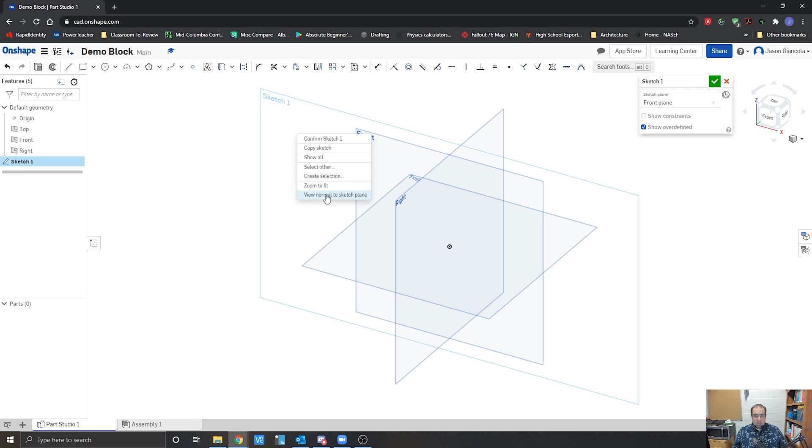This style, I'm going to do the full cutout. So we're going to draw the whole profile and then extrude it out. All right, so the first thing we do is draw a sketch by clicking the sketch button in the upper corner. We're going to right click and go view normal to sketch plane, and it's going to rotate our view to where it's flat, looking at the sketch plane.

The next thing I'm going to do is utilize the line tool. We're going to draw this out, draw up a little bit, give it that angle, draw back, and then draw vertically down.

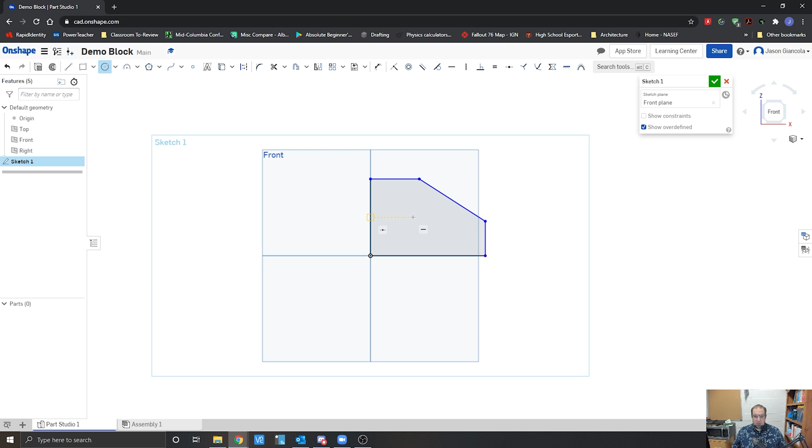Next thing I'm going to do is place this circle. I'm going to line up over the midpoints, and we're going to see a projection line coming out, and I'm just going to place a circle there. So once again, I'm going to draw everything in and then come back and dimension it.

So here we go, that's the block outline. We're now going to go up to our dimension button. We're going to click that full length over here. This whole height is 2. This length right here is 1.5. And something you're going to notice is we do not have to dimension this horizontal length.

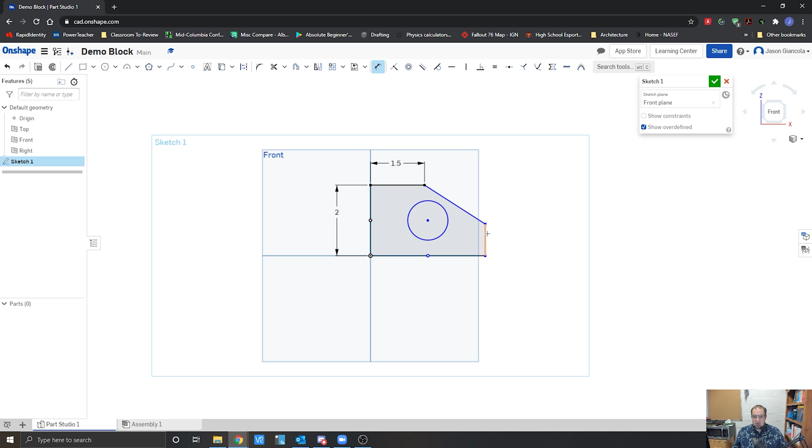This angled line right here, we don't have to dimension it because we're going to be defining both endpoints based off of the heights that we give them. And then that line will actually turn black once this one is placed. And then we just have to apply our number right here, which I believe that size is 1. And we have the sketch of the block done.

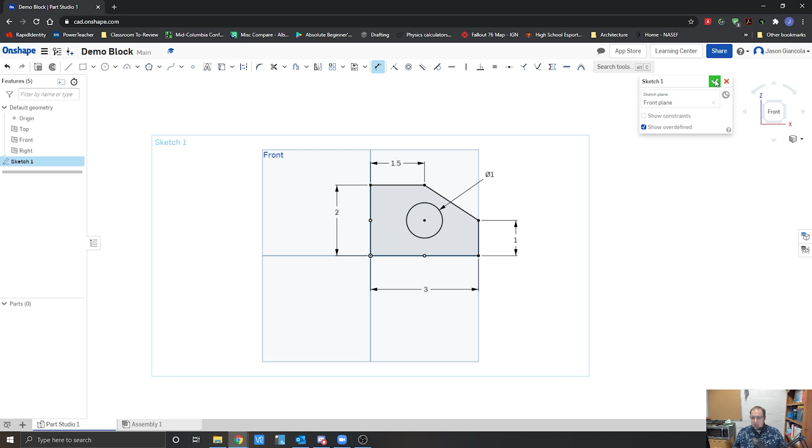Okay, so now the next part we got to do is extrude this out. In other words, applying a 3D, giving it a depth. So I'm going to finish my sketch and hit extrude.

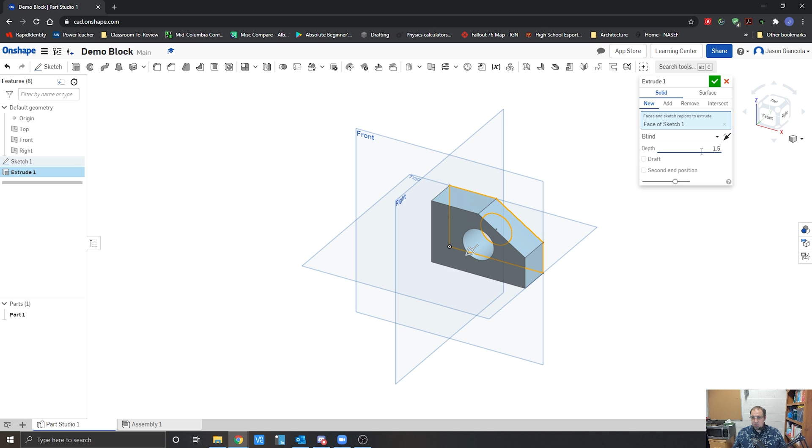I'm going to select the outside, not that circle. I'm going to rotate so I can look at this and make sure it's extruding. The distance I'm going to put in is 1.5 for the overall width or depth of it. I'm going to hit enter twice, and there's our block.

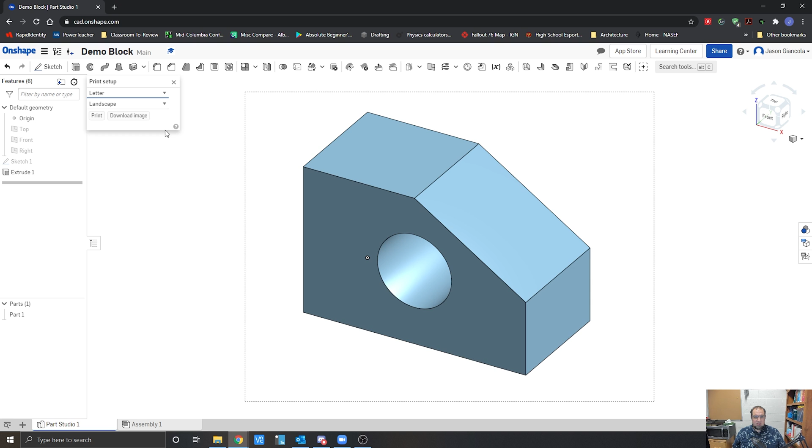To finish that off and get that turned in, I'm going to turn these off, and we're going to hit our hamburger, print. We're going to zoom in a little bit to make sure we get that full object in there. We're going to hit download image and turn in that image.

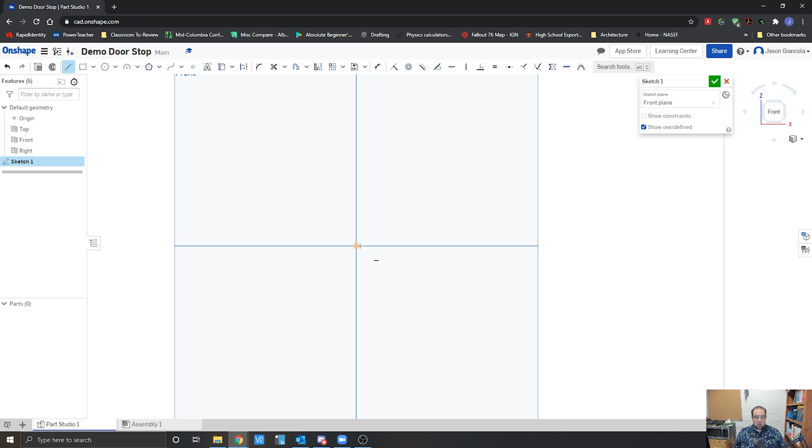So I'm just going to draw it out. There's a little bit of an up right there, a long slope back, straight to line up with our end point, line up with our origin point, and then down to our origin. Now I'm going to use the hotkey D in order to hit our dimensions, and we're going to see that happening a lot.

It's just a hotkey D for dimensions. Okay, now I'm going to put in the first height. And when I hit enter, you'll see it kind of snap a little bit, and it'll adjust the size of the doorstop relative to this dimension.

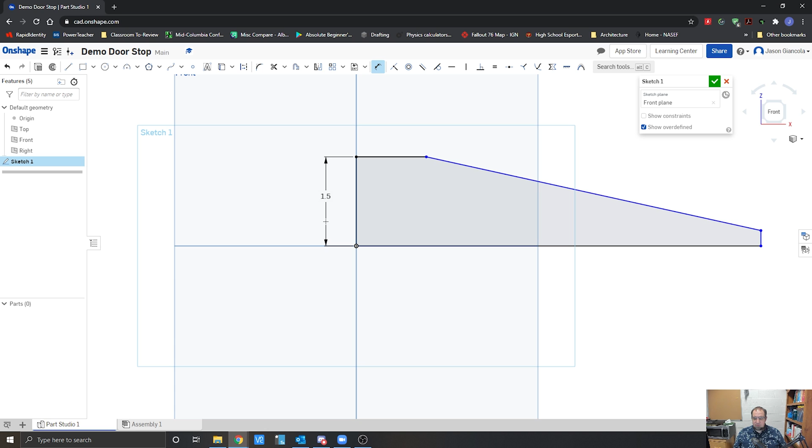Okay, we saw that adjustment happen. Now we can keep going through and applying the rest of our dimensions to the measurements needed.

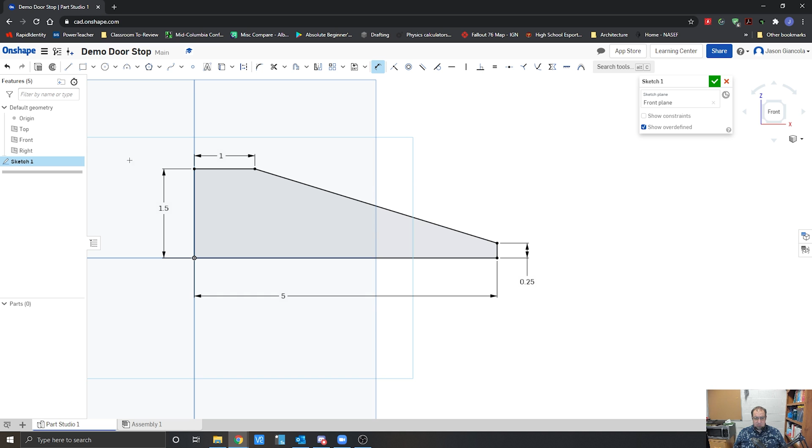All right, so there's the profile of our doorstop. We're going to hit our green check mark. We're going to rotate so we get a little bit of an angle.

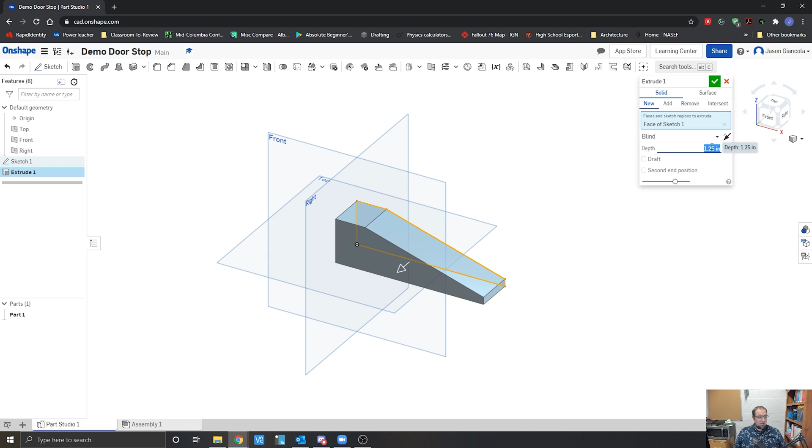We're going to hit our extrude, select that profile of our doorstop, and then draw it based off of our depth there, which we get from our top view. We're going to hit enter. There's our doorstop. Turn off the planes, hamburger, print.

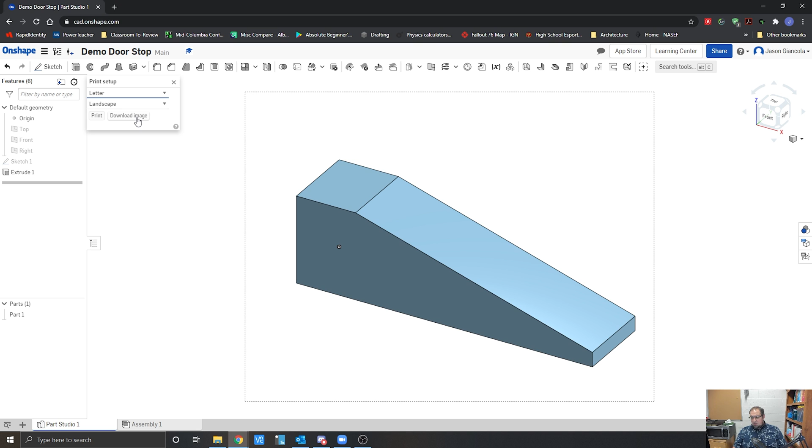Make sure it's centered, zoom in a little bit. It's inside our barriers. Download the image and upload that image to our project.

Okay, so for the first week's parts, these were the last couple here. The last one is our base support. What it is, it's a platform, and then it has a little bump up to actually help center an object into it. That helps spread out our weight down below.

Okay, so the same thing, we're going to go sketch, and we're actually going to select that top plane instead of our front. I'm going to right click and go normal to.

And I'm going to draw out my big rectangle. Now you'll see me over here that I actually select the down arrow next to the rectangle, and I'm going to select a center point rectangle, otherwise known as R. Okay, you can see the buttons over here next to the end. It is based off of the hotkey that you can hit in order to get that. So R, if you hit that hotkey, you'd be able to get that center point rectangle.

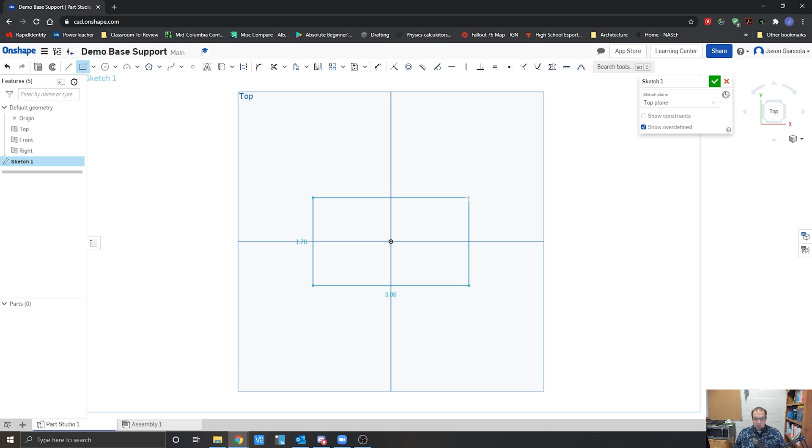Okay, now I'm always going to start with my click on that origin point. It gives it a nice anchor. I'm going to hit D for dimension. We're going to give it this horizontal dimension of 4. Once again, you'll see it snap to be a little bit bigger, and the vertical dimension right here of 2.

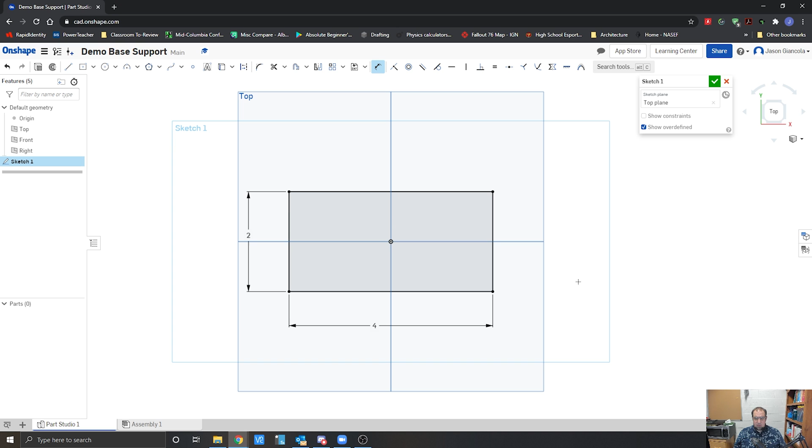Okay, so now I'm going to actually finish this sketch and extrude this. Now, am I done with this project yet? No, because I still got to add on that piece up on top. Okay, now the thickness of this is 0.25.

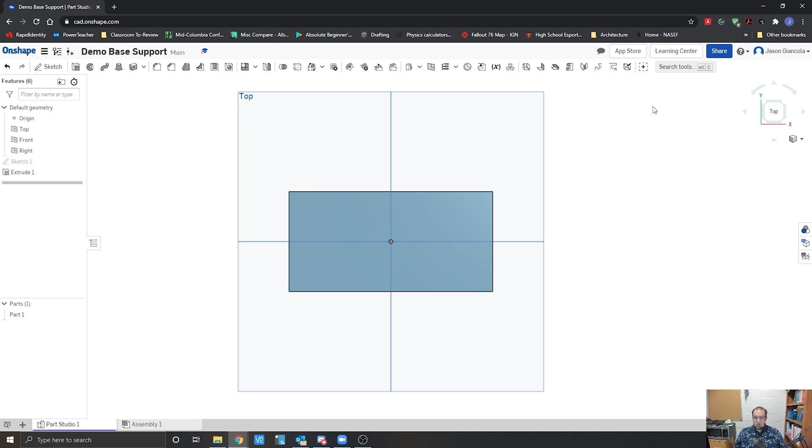Okay, oh, I forgot to select my object. There we go. So, and you can see that I went back into that extrude by double clicking, and then I was able to select that. Okay, so anything over here, you can double click it and you'll be able to actually go back into it.

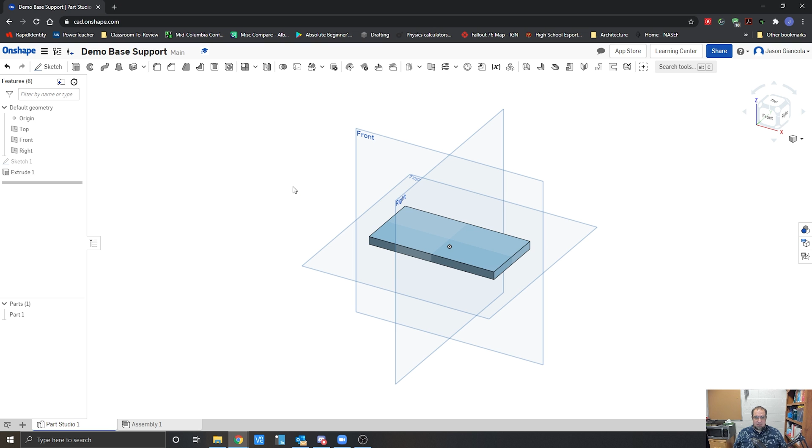Okay, now the next thing that I got to do is I got to do another sketch on top of this. Okay, how we do a sketch on top of something is, first I'm going to turn off my planes. I don't need them right now. Okay, so I turn those off.

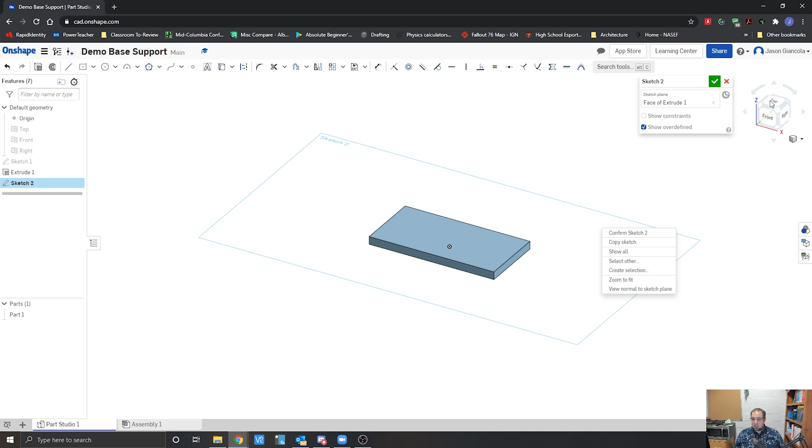I'm going to hit sketch, and now instead of selecting the plane, I'm going to select a face on an object to draw off of. So I select that top face. I'm going to rotate. You can either rotate via the view cube in the upper right hand corner, or you can right click on the sketch and go view normal to sketch plane.

Okay, I'm going to hit my circle, select that origin point dead center. You could also line up by hovering over the edges, finding those midpoints, and using those lines there too.

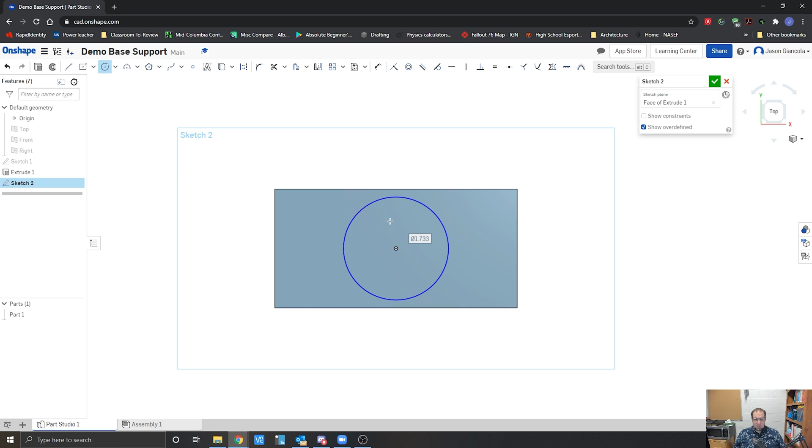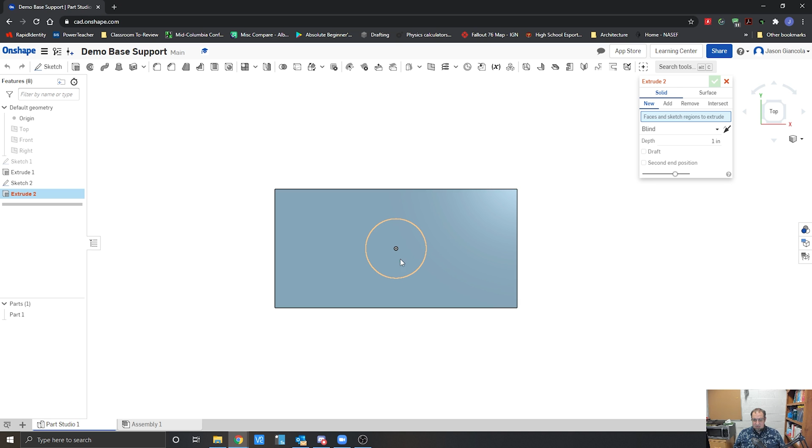We're going to use that D for dimension. We're going to hit that 1 and hit enter. That sets its size at 1 diameter. We're going to hit extrude. We're going to select inside that circle. We're going to extrude that up 0.25. Enter, enter.

And right there's our base support. Remember, hit that hamburger, print, come down. We need to make sure that it fills up that page. So it was a little big, so we scrolled back just a hair, download that image, and turn that in.

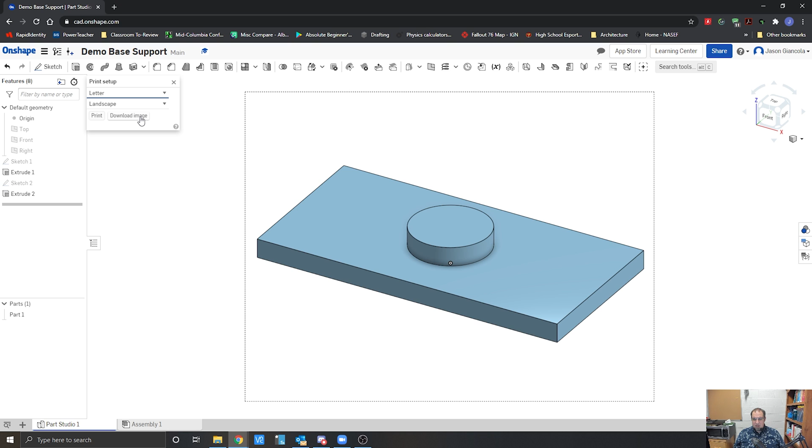All right, so this is the last one for the first week's projects. This is the flange. This is getting into utilizing the revolve command in order to shoot something around. Think like tetherball, okay? Think of that tetherball where you send it around that center post.

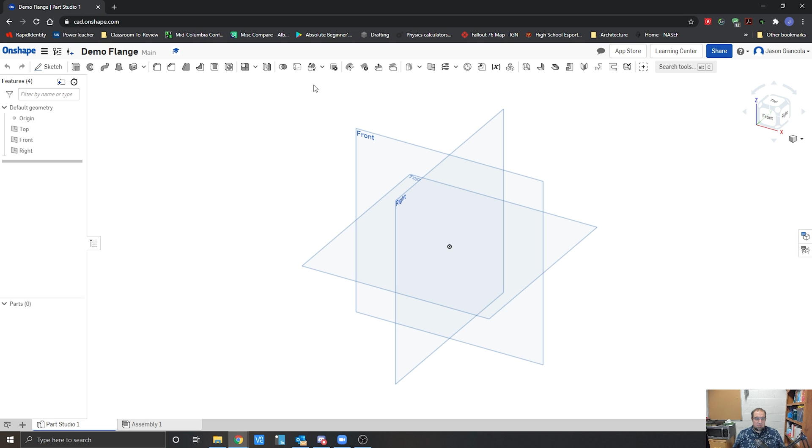So we're going to use that sketch. We're going to go on that front plane right there, and we're going to send that around that center point right here. So we're going to turn off the other planes that I don't need. I can even turn off the front, because once we started on that sketch, we don't really need it anymore.

Now I'm going to utilize something called construction. You can see it's a button right here. You can also hit Q. You'll see that it highlights right there. What that does is it creates a line that is not going to be recognized as part of a solid object by the program, meaning that it's for construction, not permanent.

I'm going to draw a vertical line right here. I'm not going to worry about that distance first, because I'm going to tie it to a height later on. And then I'm going to draw this line out here, make sure it's flat.

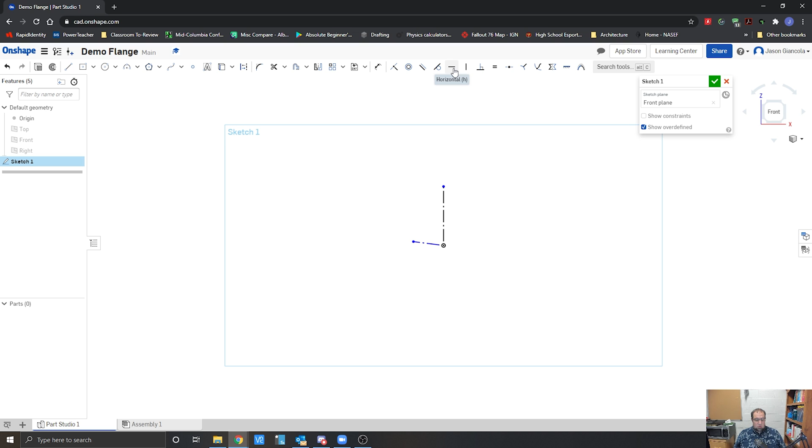This one's also for construction. I didn't draw it flat, so what I'm going to do is come up to that top, hit horizontal, or key H for horizontal. I'm going to click that down and it'll snap that down.

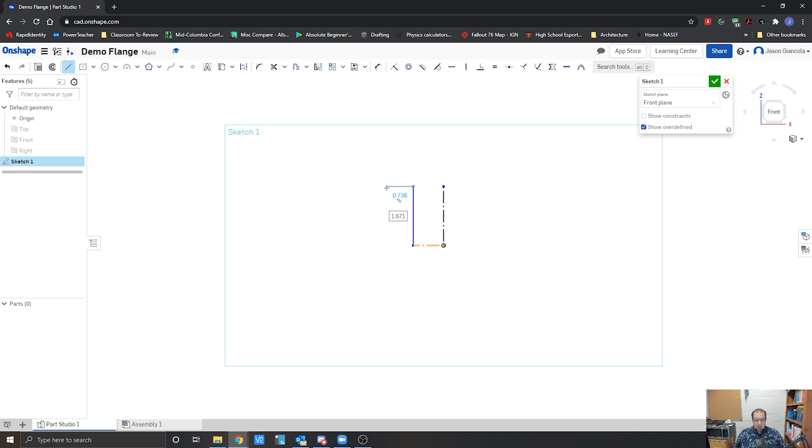I'm going to hit line by hitting L, and I'm going to draw that profile. I'm going to highlight this and kind of tie it to this point up there. The reason why I tie it to there is because I want to be able to define that height and have that line defined with it. So there's my profile of the flange.

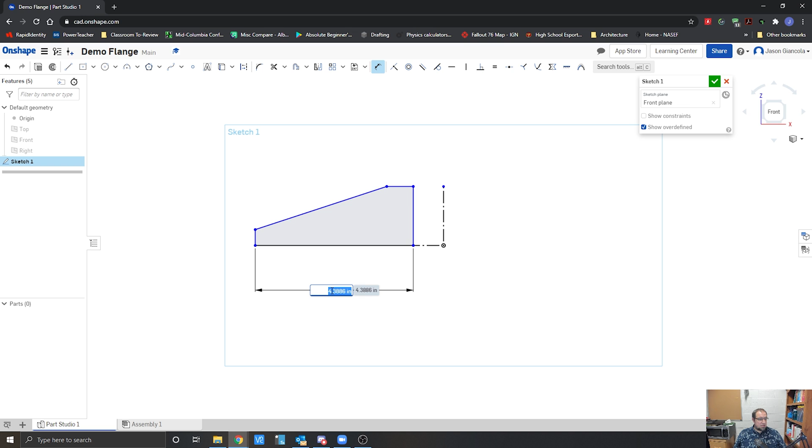I need to go through and dimension it, so D for dimension. Now I'm looking at these lines right here. This line right here is 2, you saw it snap down. This vertical line right here is 0.125. This horizontal line right here is 0.5. Now this vertical line right here is 0.5 also.

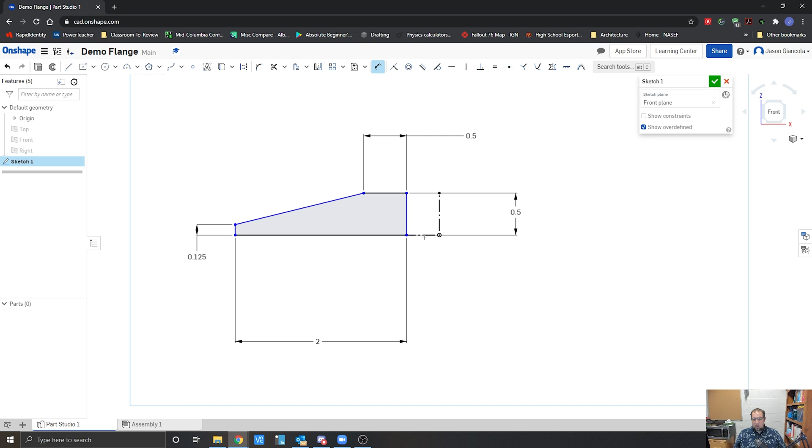Now you'll notice that it's still blue. Some of it's blackened out, but it's still blue for the most part. That's because we do not have a location distance from that origin point to this point out here. So I'm going to define that, and that is 0.25, or a quarter of an inch.

That all looks great. I'm going to drag that and move it off to the side. I'm going to move this up, just to bring these in a little bit.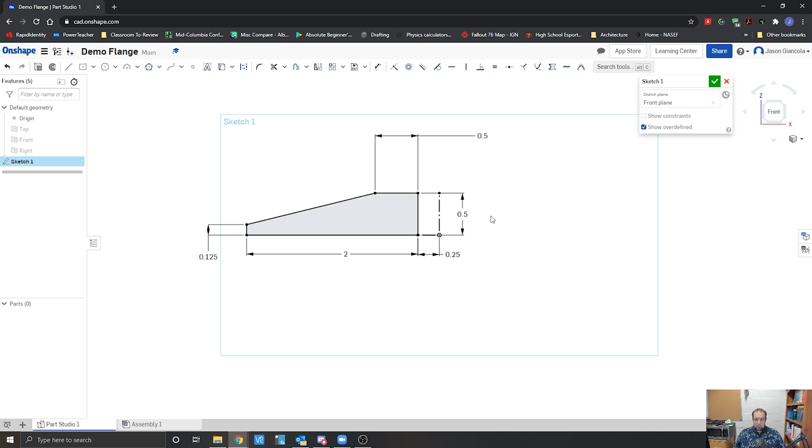Now instead of hitting the extrusion when we finish this sketch, we'll actually hit the revolve button. So the first option we have to select is faces and sketch regions to revolve. We select inside that first profile.

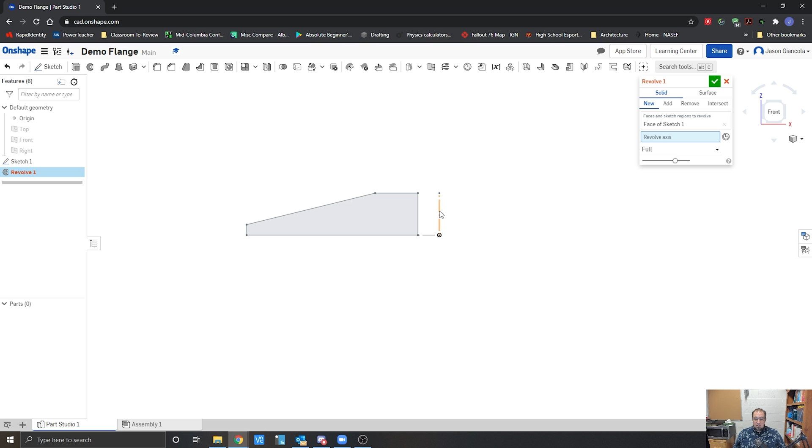Now the next part we have to do is revolve axis, meaning that's our center point - like when we're playing tetherball, it's that post in the middle. When we hit that, we see that it starts to revolve around that axial point. And because we want it full 360, we leave that as full. We can adjust that if we need a specific angle, but for right now we want it full - we want to send that thing all the way around. Hit our check, and there's our flange.

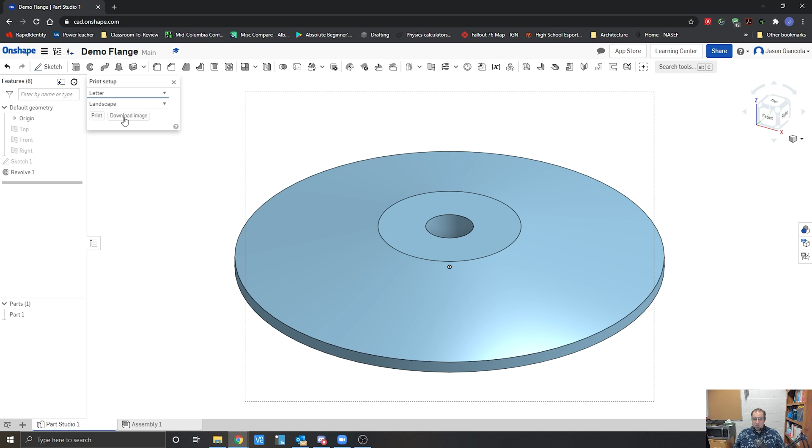Go up, hit our hamburger, print, download image, and we are great once it's inside of our box. All right.